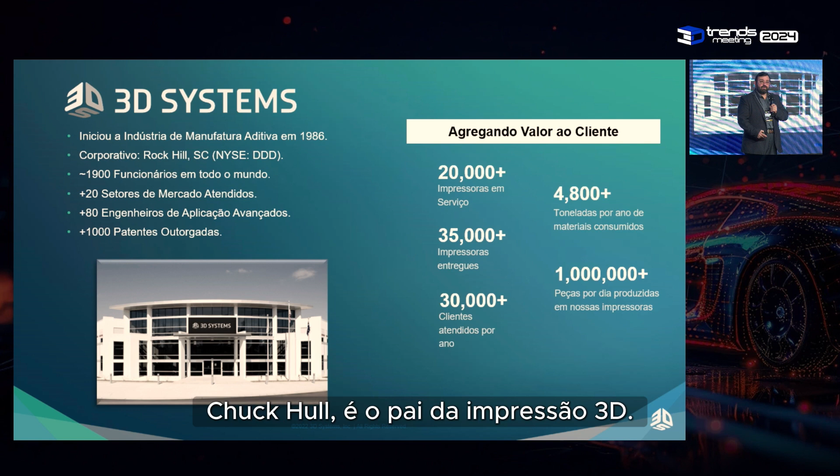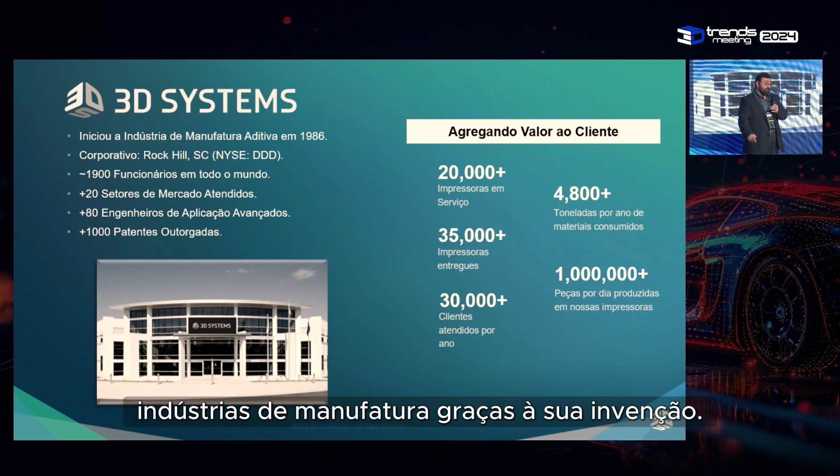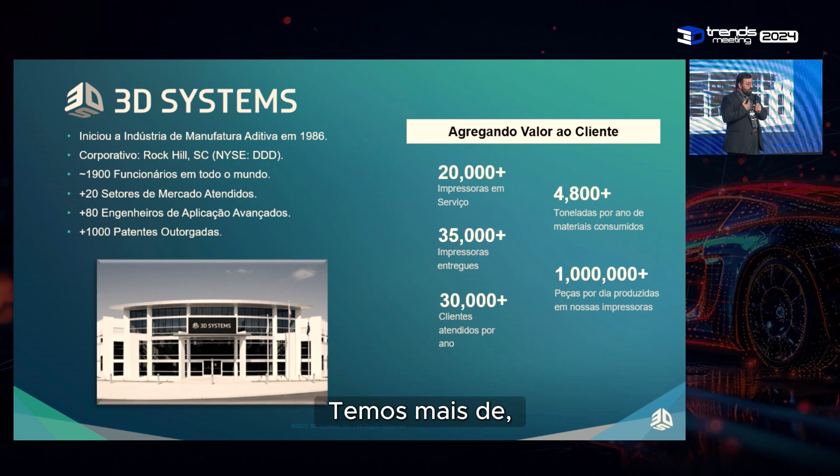3D Systems was founded in 1986, and the founder, Chuck Hull, is the father of 3D printing. He patented stereolithography, and basically he launched the whole additive manufacturing industry thanks to his invention. My company designs and produces 3D printers and a lot of specialty materials for multiple applications. We have presence in more than 35 countries. We have now around 2,000 employees around the world.

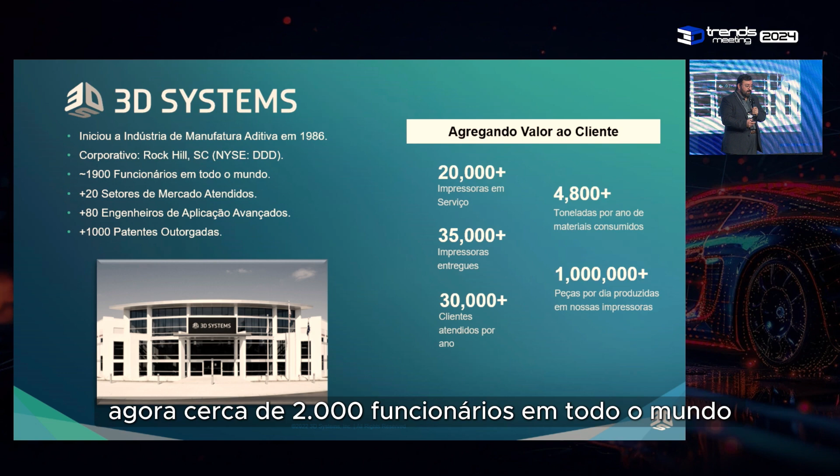One of the approaches that we as a company have is, instead of selling printers, we try to offer solutions. The solutions come from the application, the customer needs, and see if there is any printer and material that can solve that problem. Based on that, we are organized in industrial segments and healthcare segments to offer solutions, with people specialized in those industries who can understand and speak with the customer about exactly what they need and save time solving the problem, instead of just sending a product and the customer figuring out how to use it. That is not what we do.

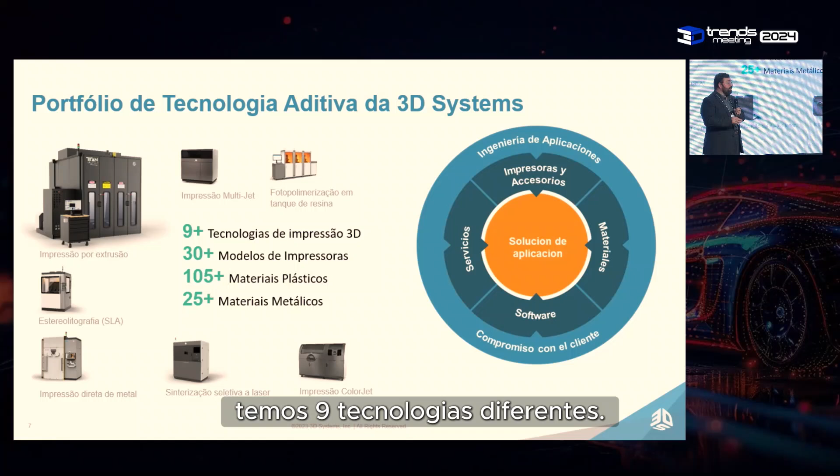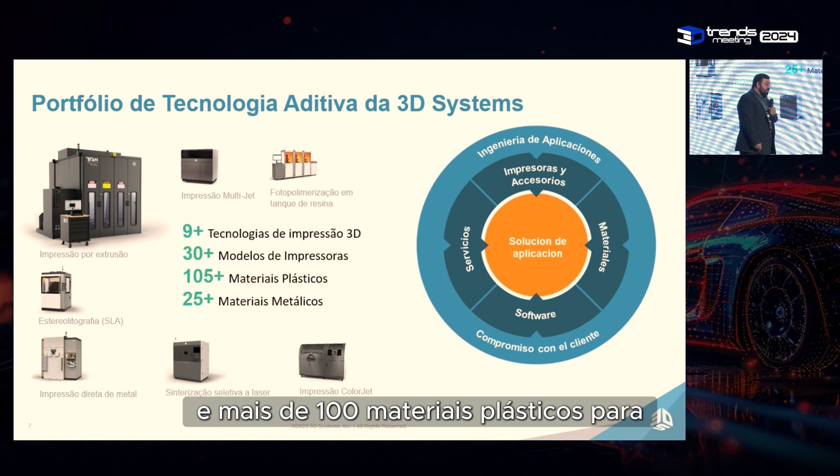In terms of printers, we have 9 different technologies, from material extrusion to photo-curing materials, selective laser, and we even have metal printers with multiple materials. For example, we have almost 30 metals developed for our printers and more than 100 plastic materials for all the other printers.

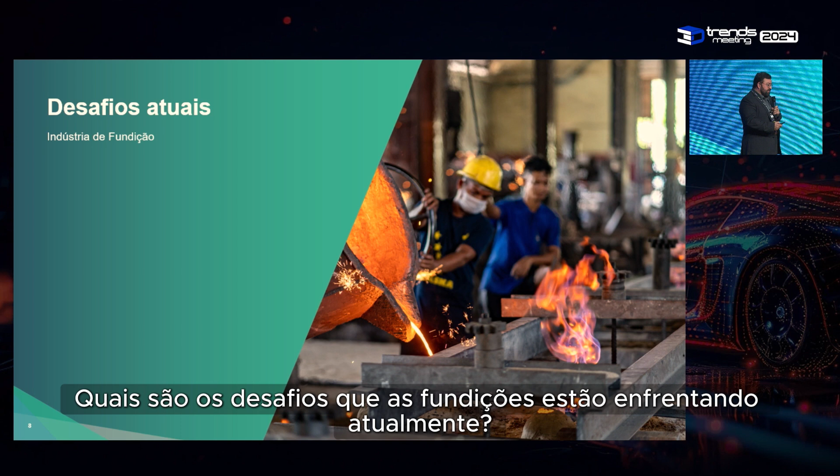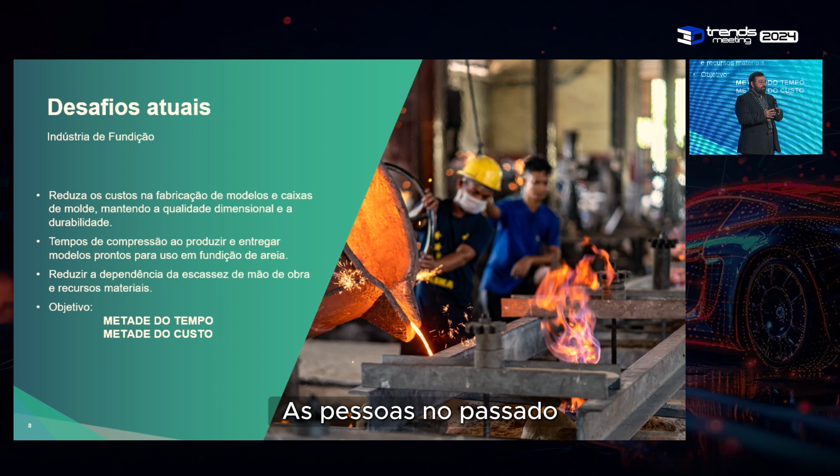Now, talking about foundries, what are the challenges foundries are facing today? First is reducing lead time. This is the major challenge, how to reduce lead time to create a model or a pattern to produce parts, and that production of the model drives the second challenge. The expertise to create models is an art that is being lost. People in the past had a lot of experience making models, and those people are retiring and the new generation is not picking it up. Now technology is trying to compensate for that expertise that has become more scarce and difficult to find.

And the other is how to reduce the cost of the mold. Producing the mold and the patterns is also expensive and sometimes requires a big production lot that can justify the investment. And in most cases, the cost of the pattern is the difference between going ahead or stopping the project.

What are the solutions that additive manufacturing is offering? Basically, printing in 3D, we can have basically any geometry we want, which can simulate what a model maker used to do by hand, working with wood and other materials, printing the mold directly. The limitation in the past was that commercial printers were small in size, and industries like the auto industry or energy have been working with very, very big parts, and the printers were not big enough.

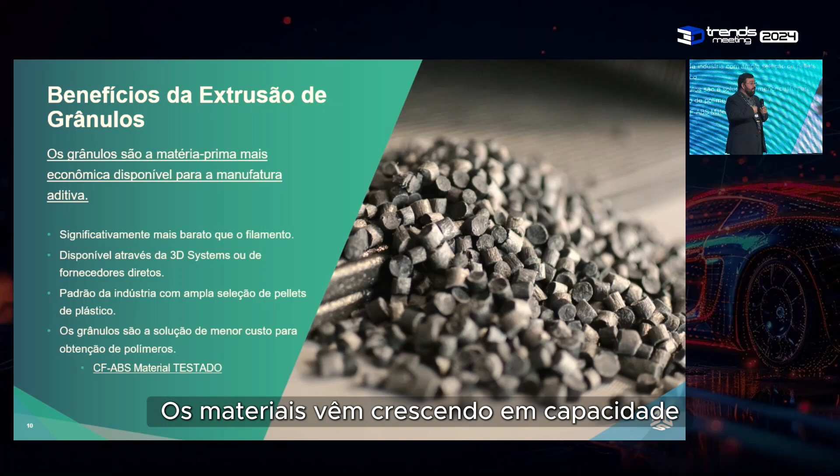The materials have been growing in capabilities and technology, and now one of the advantages is that the printers can directly use the raw material that is used in the injection molding industry, that is, in pellet form. The pellet is the most cost-effective material, with the same properties that we can get from injection molding. That is one of the major advantages.

And with composite materials, with carbon fiber or glass fill, those kinds of additives or composites make a plastic equal in terms of abrasion resistance to some metals, even in some cases superior to the metal. Metal tends to wear faster for some reason when exposed to sand. And this has been a solution that has been successful with a lot of foundries.

This material, the carbon fiber ABS, is the material that has been proven in the last 3 years after testing different materials through time. And this is a good solution that has been lasting more than 3,000 shots and is still working.

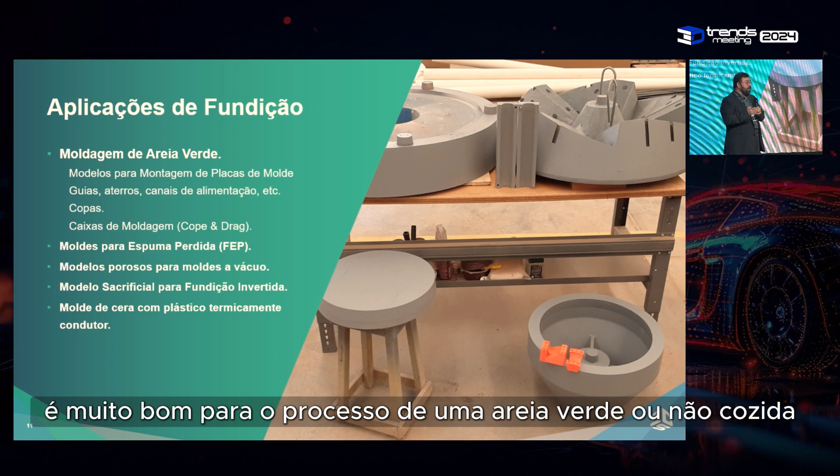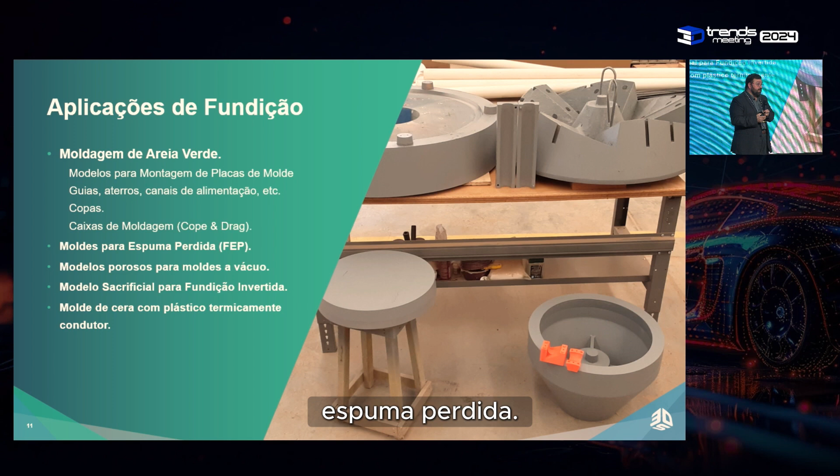One example is once the pattern is printed, it is very good for the process of green sand or no-bake sand. However, it has also been tested in different kinds of technologies like investment casting or lost foam. Those are the other technologies that have been tested, but the major advantage has been in the green sand and the no-bake process.

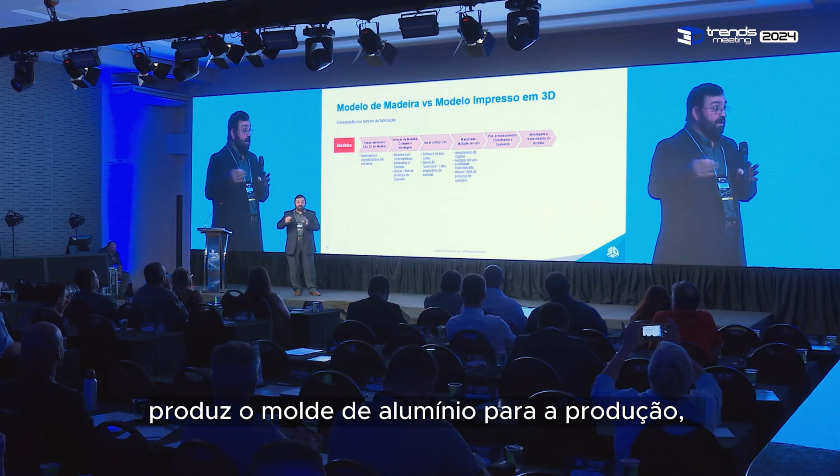When we compare how a traditional mold is produced, depending on the volume, it always starts with a master pattern. The master pattern is done with wood, and the wood needs to be a very special material, like mahogany, to have good durability. If the volume is going to be big, that master produces the aluminum pattern for production, and the wood remains as the master to produce more in the future.

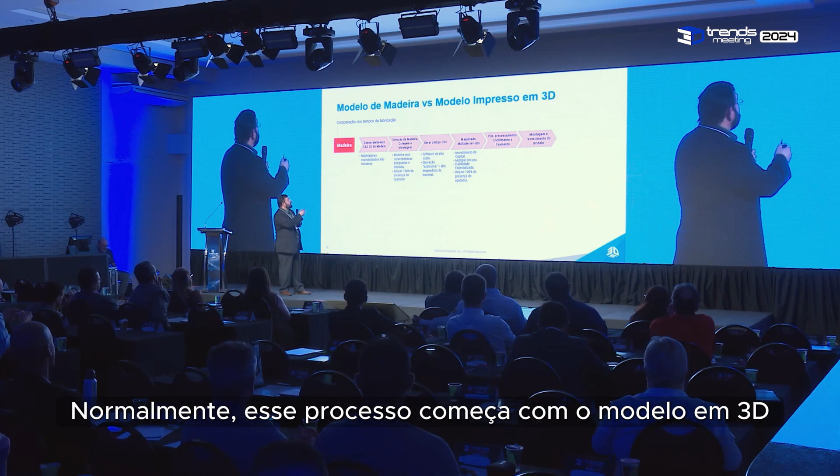Usually this process starts with the model in 3D and then generates the CNC programming and multiple setups, and all this time, on average, parts take between 6 weeks to 2 months.

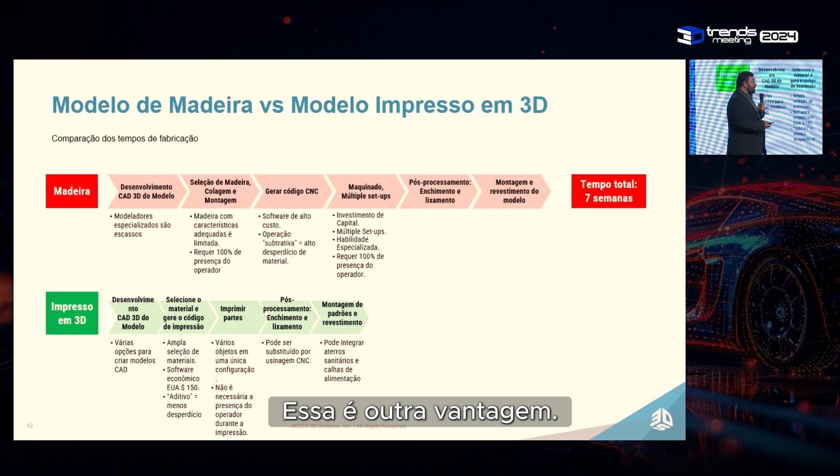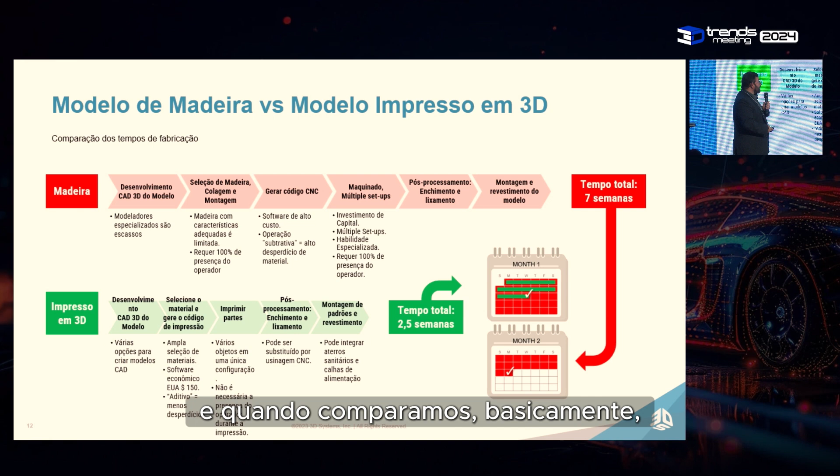When additive manufacturing comes in, the code generation is automatic. There is no manual programming for CNC. That saves time. Printing the parts can be done in the same day. That is another advantage. The post-processing, like coating and painting the pattern, is still the same, but the major advantages are in the intermediate steps. When we compare, basically, we are looking at a 4 to 5 week reduction in time, thanks to the advantages in 3D printing.

The other concern that customers had, and why we launched this study, is the durability of the pattern during usage. One part, for example, was 3D scanned and documented just as printed, and then after 16,000 cycles using the process for sand casting, was re-scanned. Well, actually it was scanned every 2,500 or 3,000 cycles and monitored.

And even at 16,000 cycles, the part is still within the expected tolerances, showing that the wear has been very low for the parts using ABS with carbon fiber.

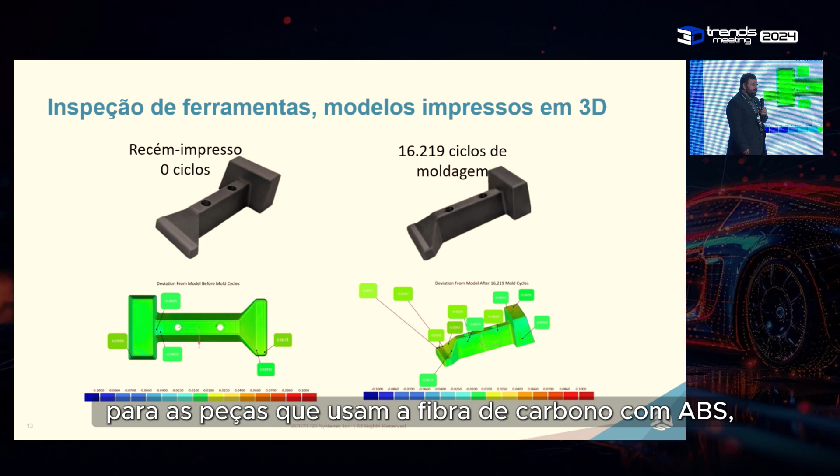Another of the limitations is that even if the wood is available, it needs to be within certain parameters for the application. For example, wood for furniture is not the same as for production in a foundry, and it doesn't necessarily always meet them, which makes it a little more difficult to use. The other is that 3D printing, based on big size printers, can simplify the assembly or the process to create the whole boxes for sand casting.

The cost of the material per kilogram or per unit of volume is also much lower. We are talking about $300 for a box, while the equivalent in wood is almost $500 in the same volume. The lead time is basically the major advantage, because it can be printed in a few hours instead of waiting on the lead time of the wood.

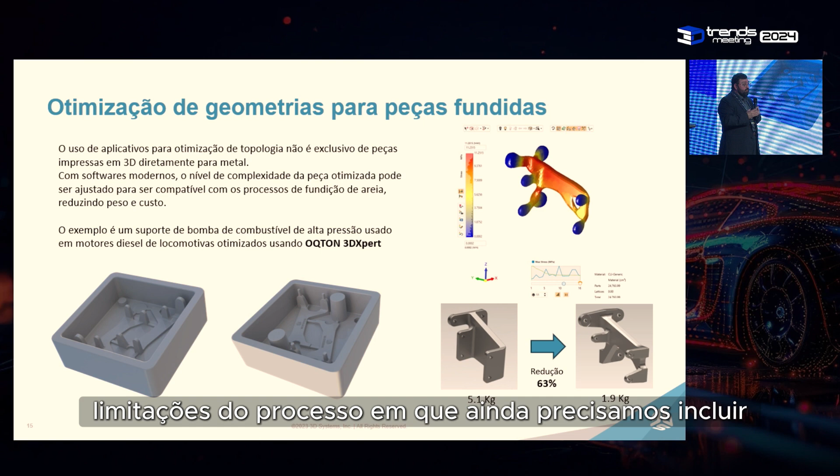Usually we have been familiar with topology optimization more for 3D printing directly in metal, minimizing the weight and minimizing the mass of the part. But for foundry, there are process limitations. We still need to have draft angles. We still need to have consideration of the process, but there are options to make further optimizations with the newer software. There is another option to reduce mass if necessary.

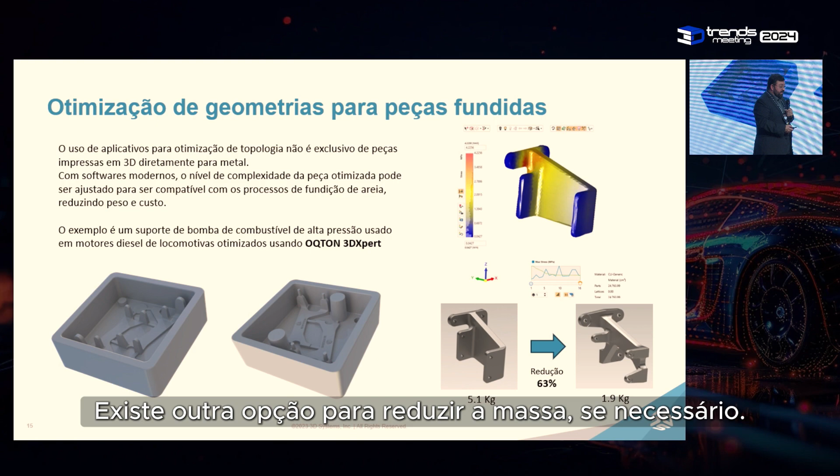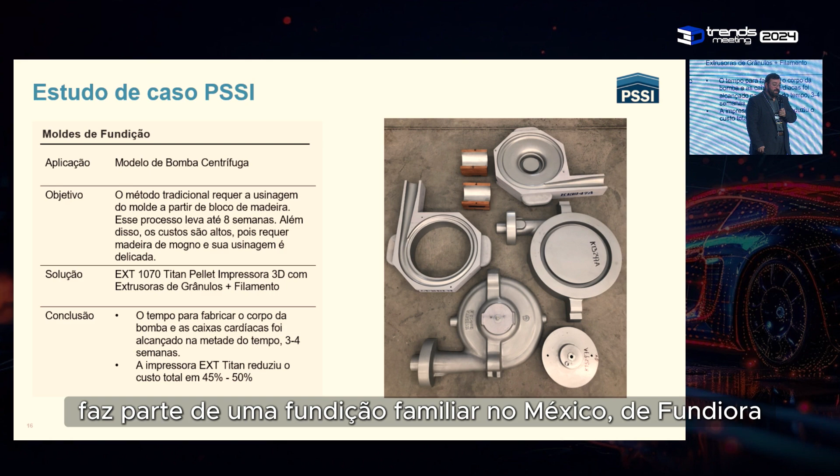Case study. This company, PSSI, is part of a foundry in Mexico, Fundidora Morelia. They started the first project with a water pump housing. This basically was their first project. In this one, they generated all the parts, the internal cores, also the external parts, and they applied a final painting to improve the surface quality. The reduction in time was 50% to prepare this compared with the wood process.

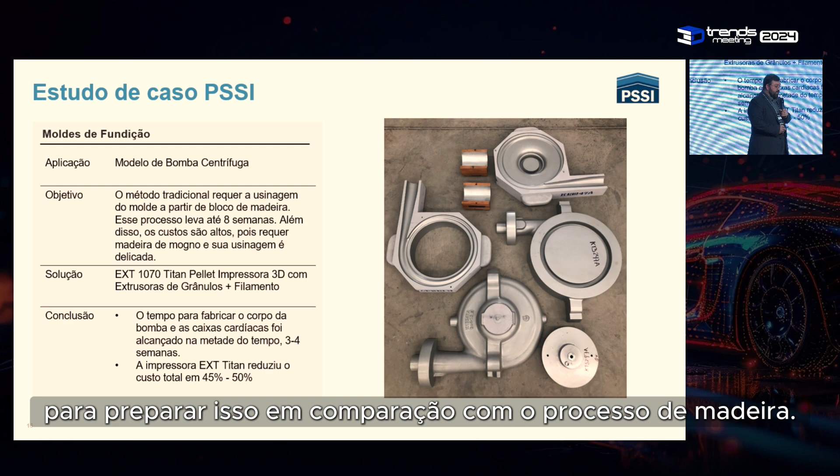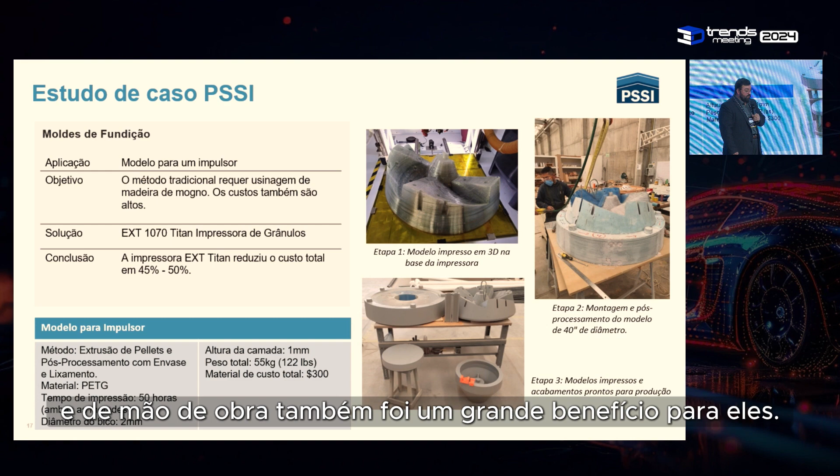In a similar case, this other study was for the impeller. The impeller was printed in two halves because it was too big for the printer, but the two halves were assembled afterwards, and once assembled it is like a single piece. This piece weighed 55 kilograms, but the cost was just $300. The reduction in time and labor also was a big benefit for them.

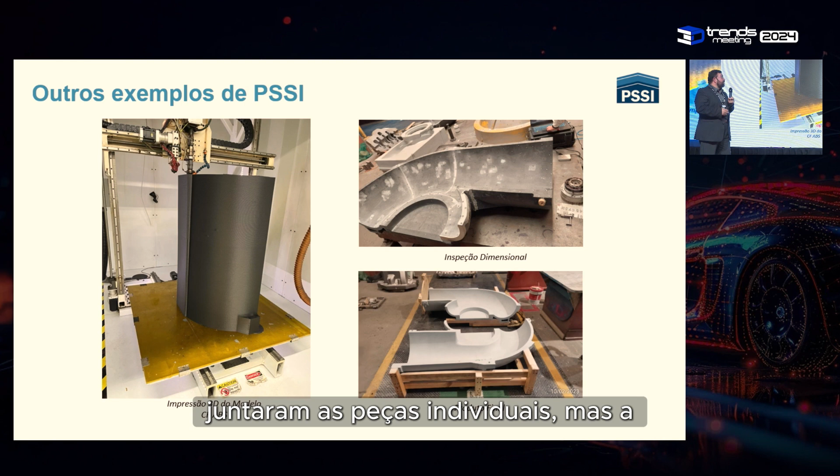Another example they have been sharing is very big parts, and in this case, for example, it was printed vertically because of the size of the printer. But at the end, you can see in this assembly, they put together single pieces, and the solution was also a reduction in time and cost, and the labor was much less than traditionally working with wood.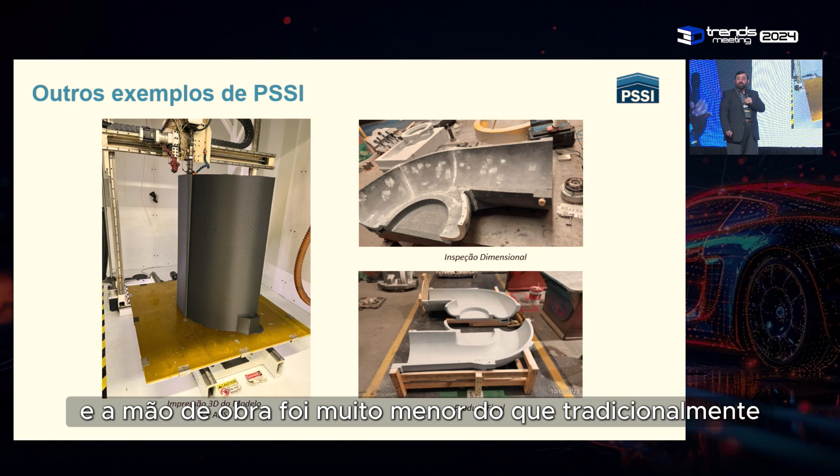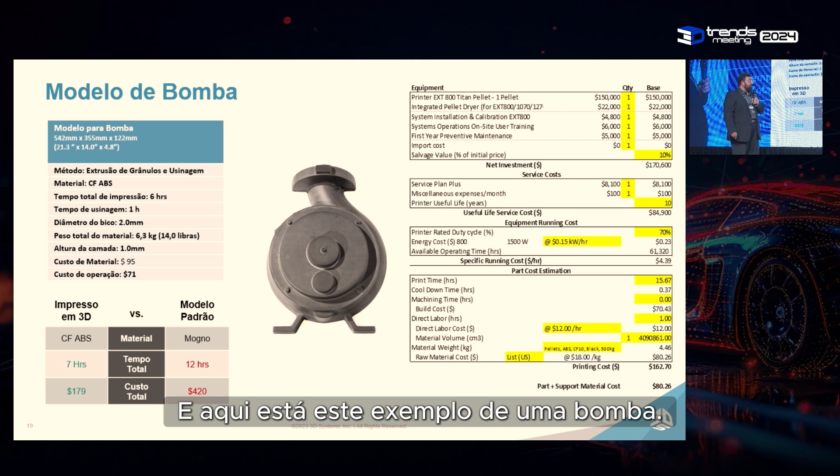For cost estimation, we created an Excel file that can be a good simulator to estimate the cost of printing a part. In this example of a pump, we start with all the investments in the top area, basically all the investment required for the printer and accessories, the service package, and the cost of energy, and based on 10 years of usage the estimated cost per hour running the printer is less than $4.50 per hour.

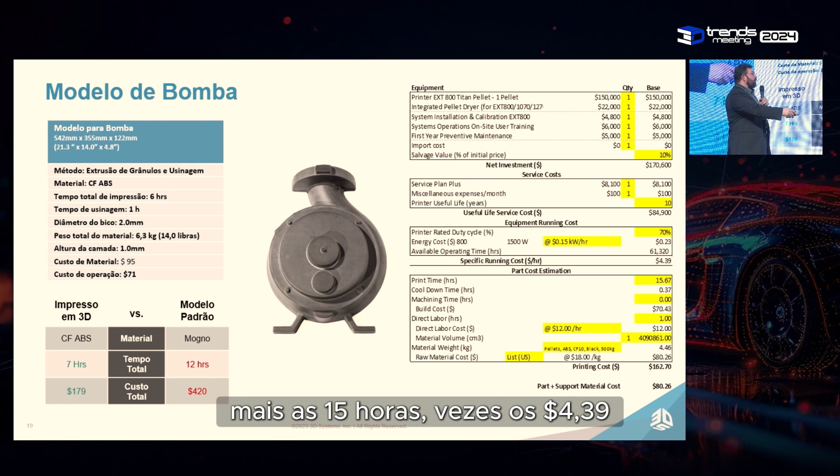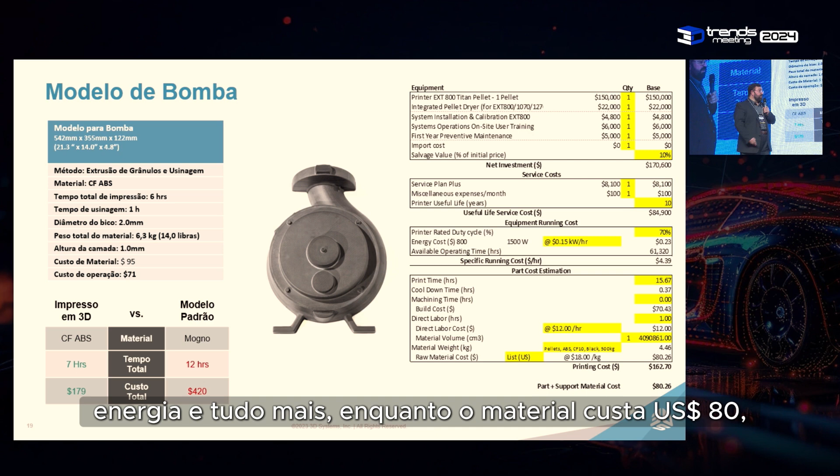Then we calculate the printing time, in this case 15 hours, and the 15 hours times 4.39 is $70. We put the volume of the part, and this gives us the cost of the part with all the investment, energy, and everything, while the material is $80 for a part that weighed 6.3 kilograms. This is a very comprehensive and complete cost estimation that can give an idea how much it costs to operate the printer and how much the material costs.

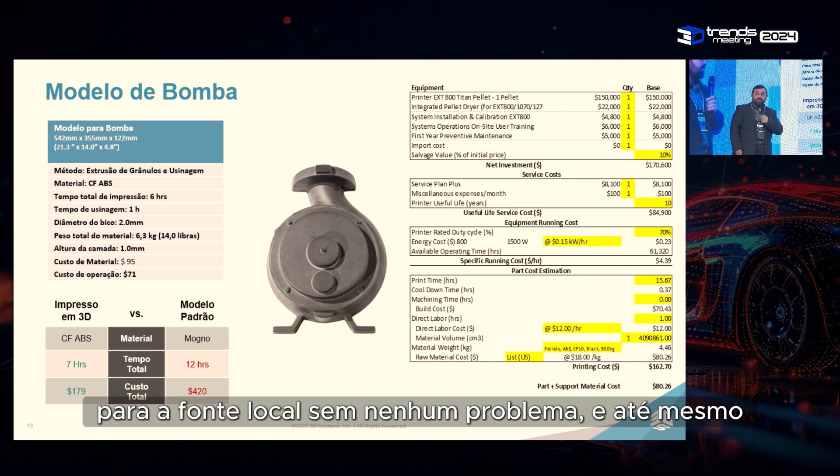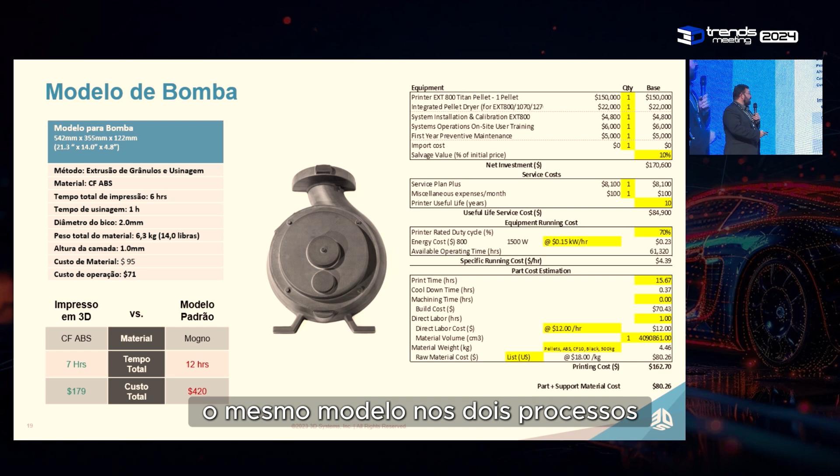We are talking about a material of $18 per kilogram. This is priced in the United States, but because the printer is open source, the material, if it's available in the country, can change to a local source with no problem, and could be even more cost effective here than in the US. When we compare the same model in the two processes, we are talking about $179 versus $420 using wood material.

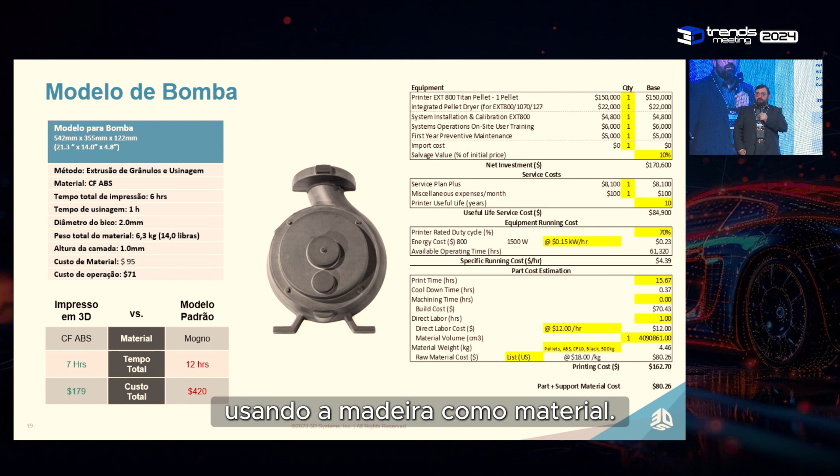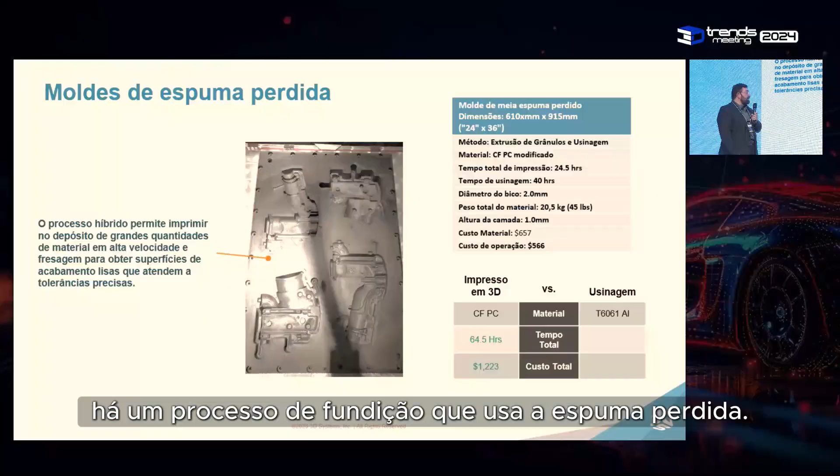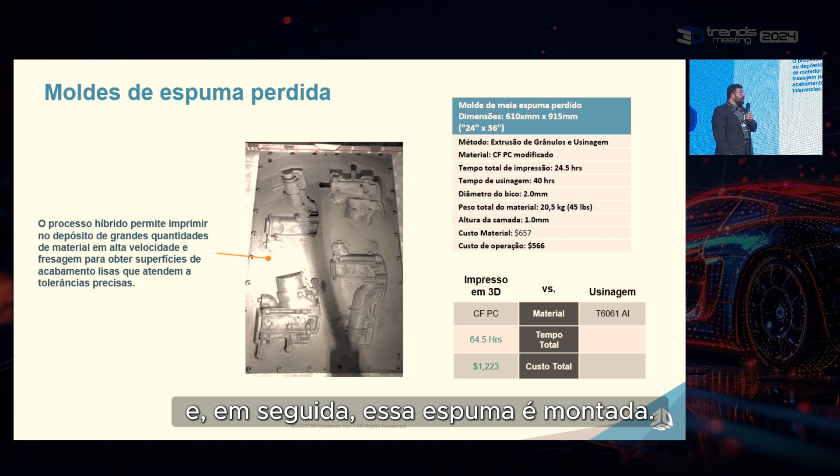There is a foundry process that uses lost foam. Lost foam is used for more complex parts like engine blocks, and basically we are printing the whole model to apply the polyurethane as a foam, and then this foam is assembled. This is in process but looks promising to also have a solution for another foundry process.

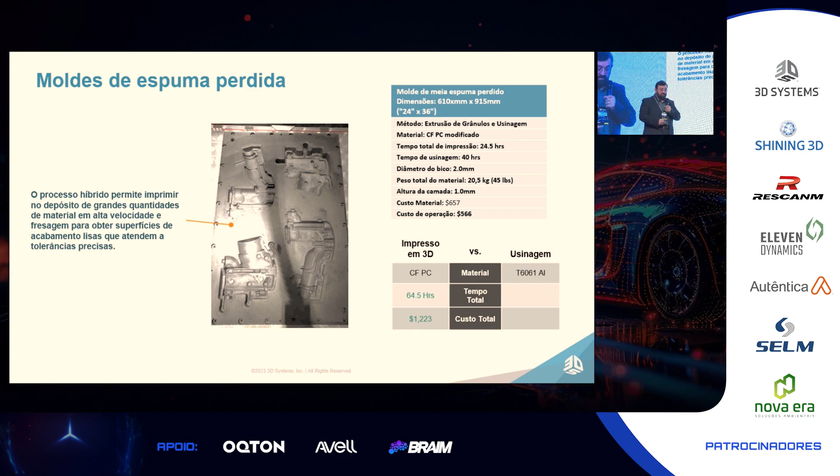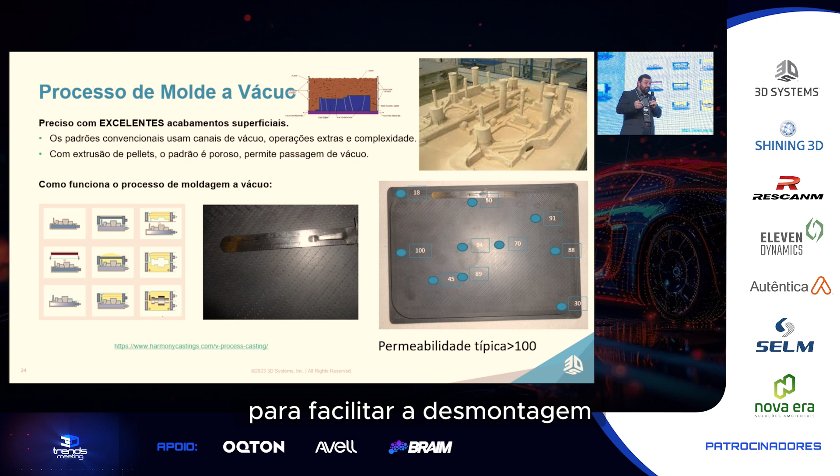Another process that is also special is the vacuum process, where the mold is covered with a film to facilitate the disassembly and also to have better surface quality. This is basically a simulation of how the vacuum process works, and the 3D printed mold has been proving a lot of advantages, because 3D printing can use porous material, and with the porosity, the vacuum of the film is more effective. The molds are also simpler to design, because there is no need for vacuum channels or other assistance for the vacuum passages.

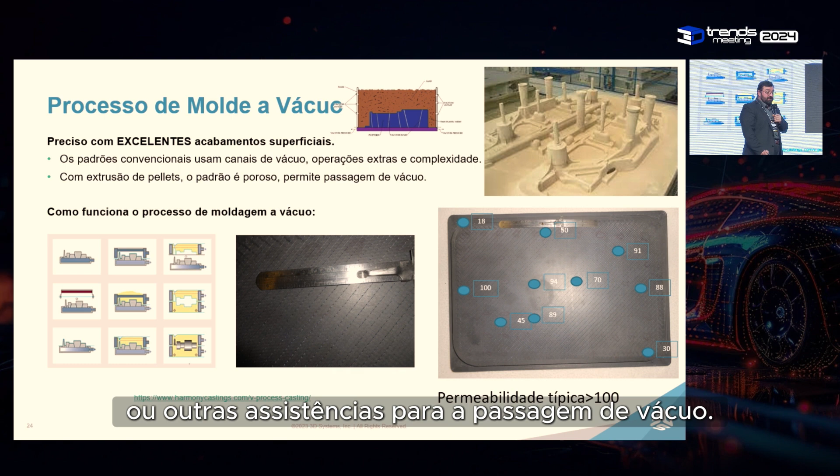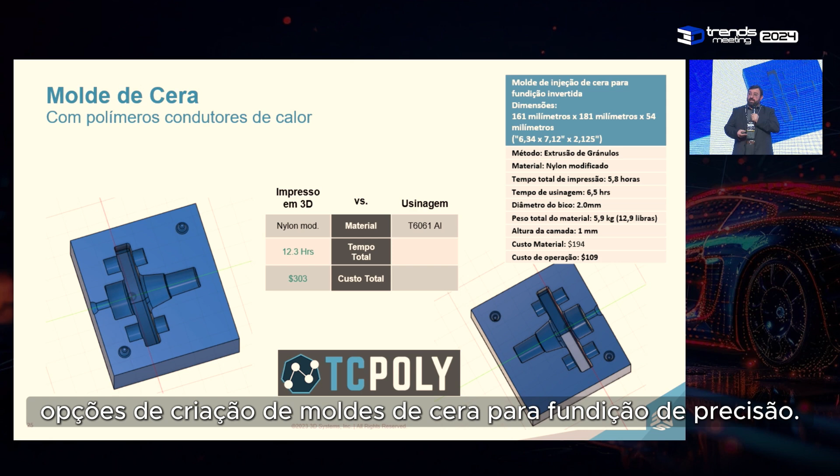Wax molds also have been tested. One of the materials that has been tested is made by this company, TC Poly. It is a plastic that has thermal conductivity capacity. There is also another project in process to have options to create wax molds for investment casting.

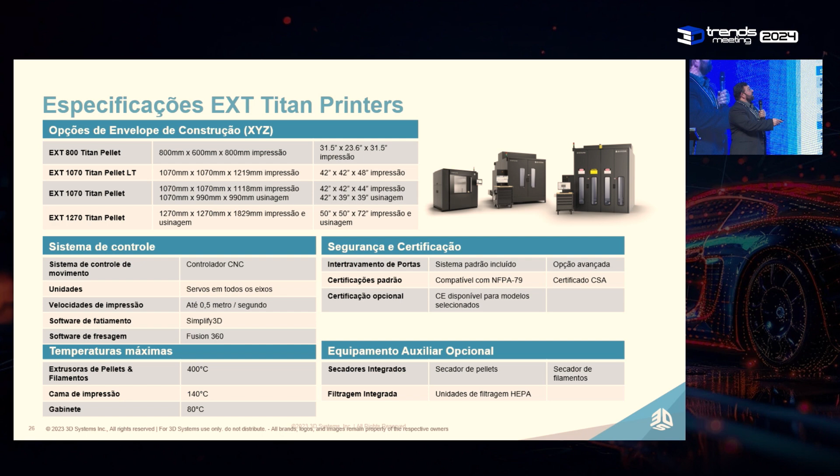To show the printers that we have been using for this process, this is the family. The family is the Extrusion Titan, and we have 3 models. The small model was just launched in the middle of this year, but we also have the big one that is 1.2 meters that even has a machining tool option if necessary. Those are the printers with the volume that have been producing all these parts, and the raw material using pellets has been the big success.

Another advantage that we have: the build chamber can be preheated to avoid distortion during printing, and that has been a very successful solution to avoid printing problems that other printers or competitors have been experiencing, because all the print inside of the printer is warm to avoid distortions.

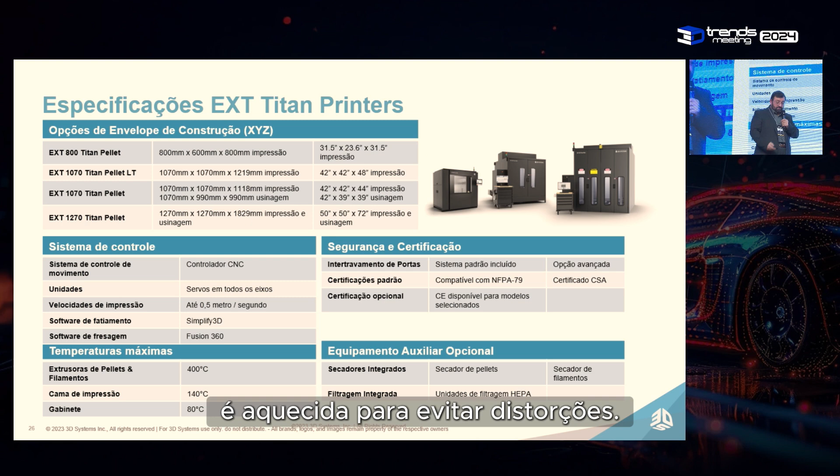And here, for example, just part of the marketing campaign, just to show the configurations of the 4 different printers. There are several accessories that can be attached, but basically the bigger size printers are prepared to have everything. But even the small one has as standard the pellet extruder, to have the best cost material.

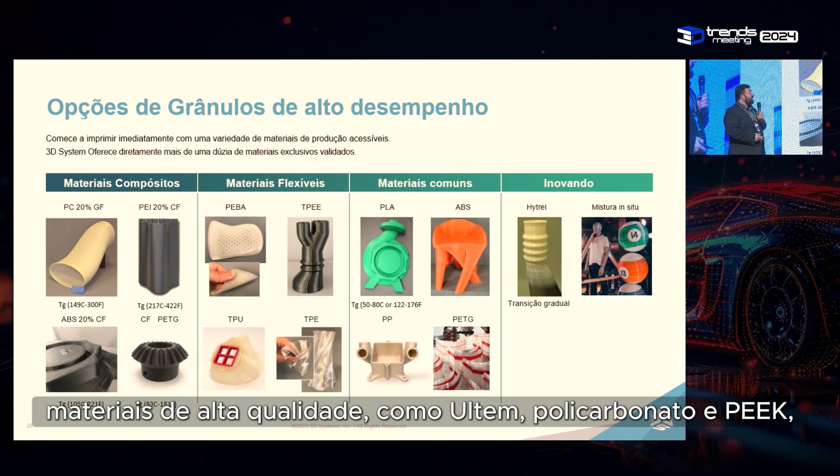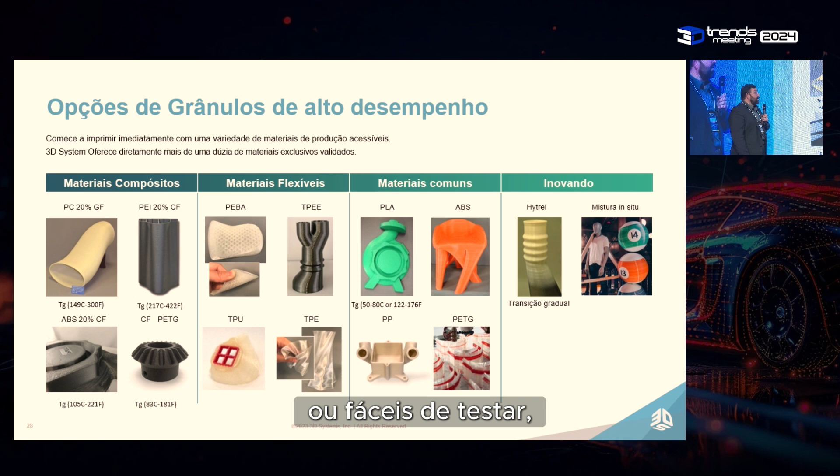As I mentioned at the beginning, all the pellets that are the raw material for injection molding open an opportunity for multiple applications, not only in foundries, where, for example, high-grade materials like ULTEM, polycarbonate, PEEK are available to print. The printer can work with those great materials, but also the common and commercial materials are available for rapid prototyping or easy testing, and also innovating with a solution, for example, transition from a hard material to a soft material in the same part. That is another way to consolidate parts and eliminate assemblies.

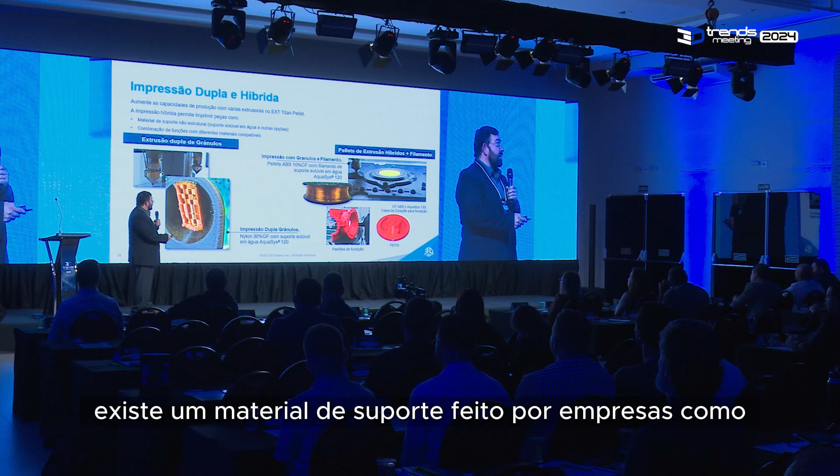Another solution in 3D printing: if the application requires supports, there is a support material made by this company, AquaSys, that is water soluble, and this means the print can be put in hot water, and the support is made of corn and dissolves and is completely biodegradable. That doesn't contaminate, and it is a big advantage having a support that can be dissolved and not a special disposal process.

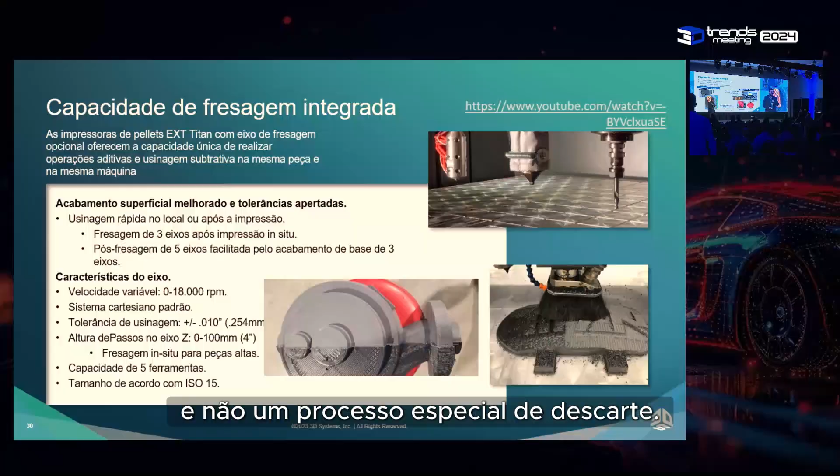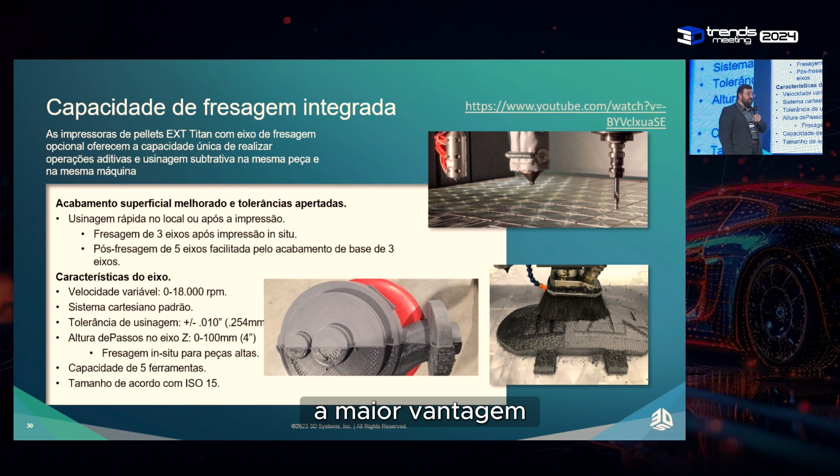The machining capabilities give us the advantage that, for example, we can use very high speed with a rough surface and finish the surface with the machining. But the material here is the biggest advantage. This is just displaying the best times to print parts.

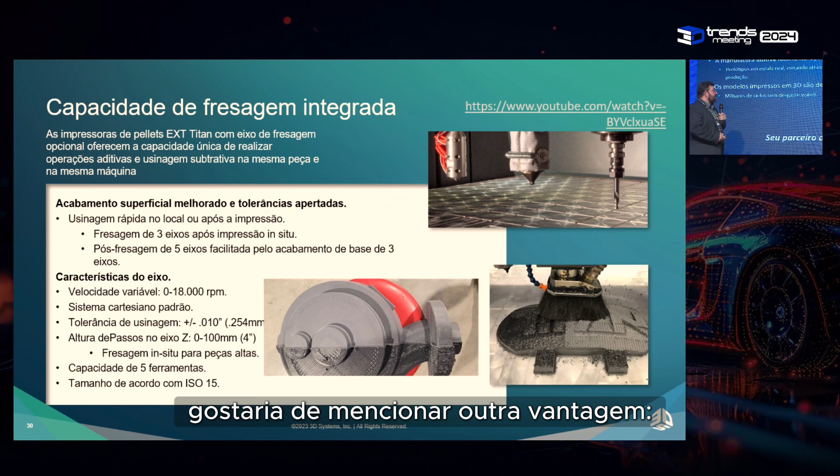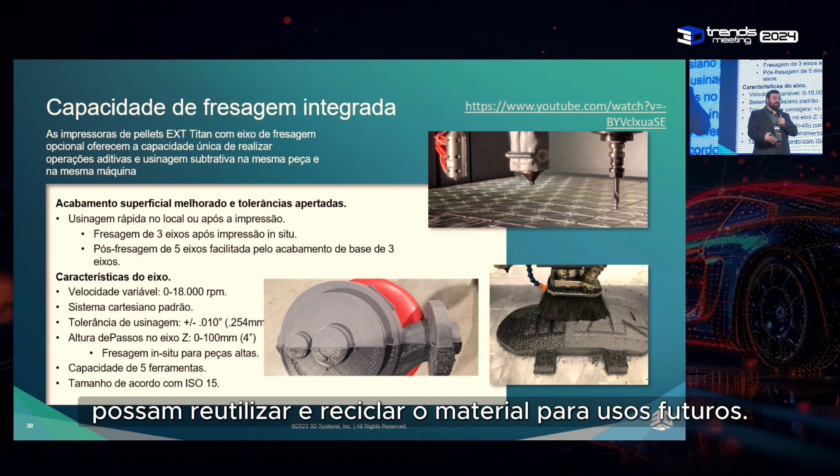Before jumping to the conclusions, I just want to mention another advantage of using the pellet material for 3D printing. This material is thermoplastic. Customers that have been using this technology have been able to reuse and recycle the material for future uses. And one of the big problems also for foundries is when they have the tool and they finish the order for the customer, they store the tool for months and even years until a potential new order, and they have a storage area bigger than the production area. They have patterns and tools for years, and they don't want to dispose of or destroy them because of the concern that a new order from a customer could show up soon.

With the 3D printing technology, they are starting to create digital inventory. With the digital inventory, you print the pattern, deliver the batch of casting parts, and then you destroy and recycle the material. And if a new order comes months later, just reprint the mold. That saves space, saves time, and also material can be reused, and is one of the major advantages. The material is repelletized again to be consumed in the same printer, and that has been also a big advantage from a sustainability approach.